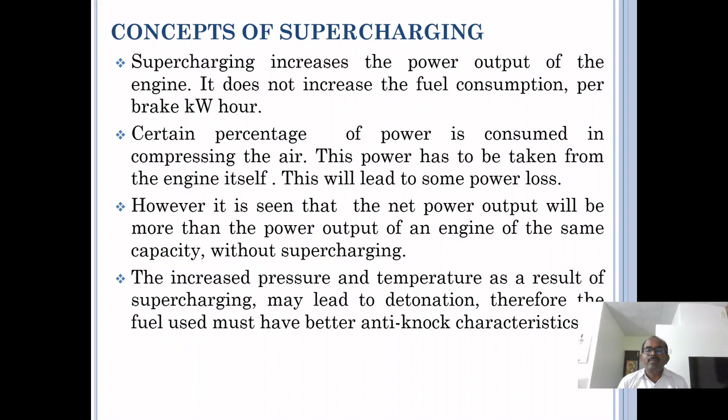The increased pressure and temperature as a result of supercharging may lead to detonation. Therefore, the fuel used must have better anti-knock characteristics. So in practice, racing car engines use supercharging.

The most important areas where supercharging is of vital importance: a supercharger is the pressure boosting device which supplies air at high pressure. A centrifugal, axial flow, or displacement type compressor is normally used. If the supercharger is driven by the engine crankshaft, it is called a mechanically driven supercharger.

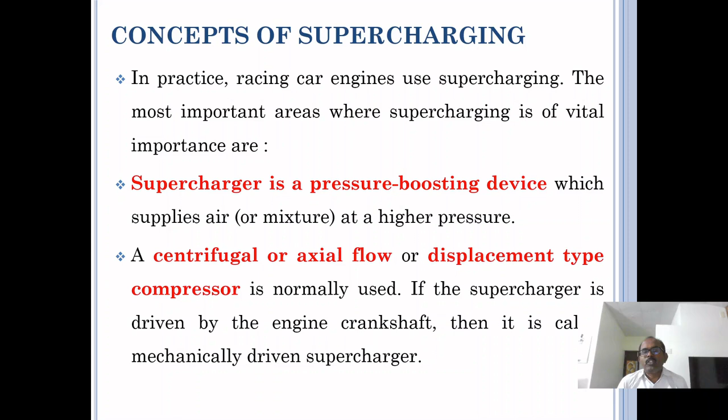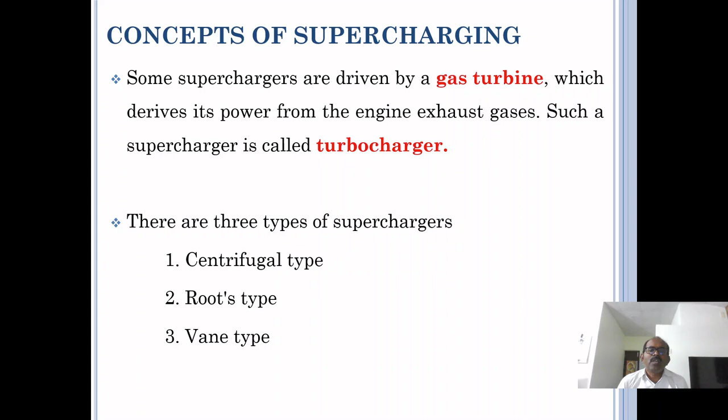Some superchargers are driven by a gas turbine, which derives its power from the engine exhaust gases. Such a supercharger is called a turbocharger. There are three types of superchargers: centrifugal type, roots type, and vane type.

Here's the concept of the centrifugal type supercharging. The air enters into the center of the pump, that is the eye of the pump. Then gradually it enters into the impeller and the pressure is increased, then it enters into the diffuser and volute casing. The casing gradually increases, so the velocity is reduced and pressure is increased.

At the outlet of the centrifugal type, the pressure is increased with minimum losses. So as compared to other types, the centrifugal type gives more efficiency.

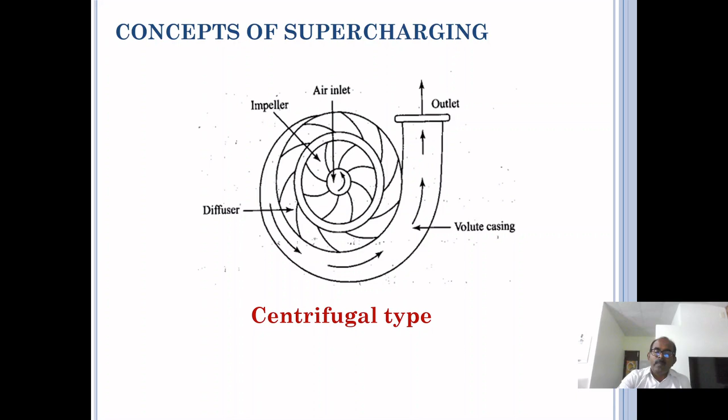Next, the concept of roots type. Two rotors are there, rotating. The rotors are just not in contact between them. The vacuum is created inside the pump, which sucks the air. Then the two rotors come into contact, and at this time the pressure is increased at the outlet.

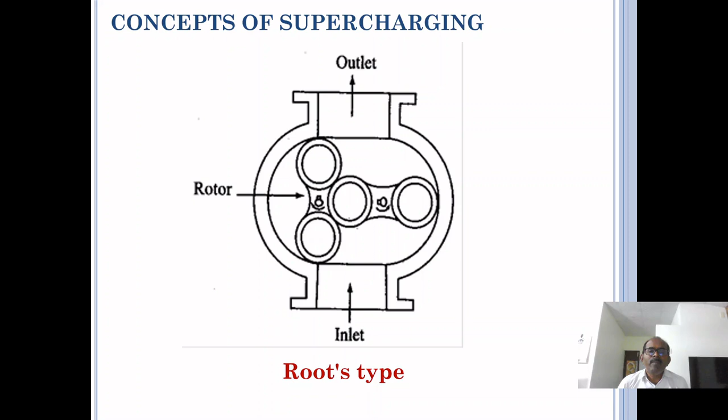Next, the concept of supercharging with vane type. During the rotation, the vanes are eccentric to the center of the body, the drum. So each and every vane has a spring type vane mechanism.

During the suction state, the vanes' springs are compressed, so in that condition the entire air is sucked through each vane. After that, after a second of rotation, it is suddenly released with high pressure. So this type of vane is used in small type applications.

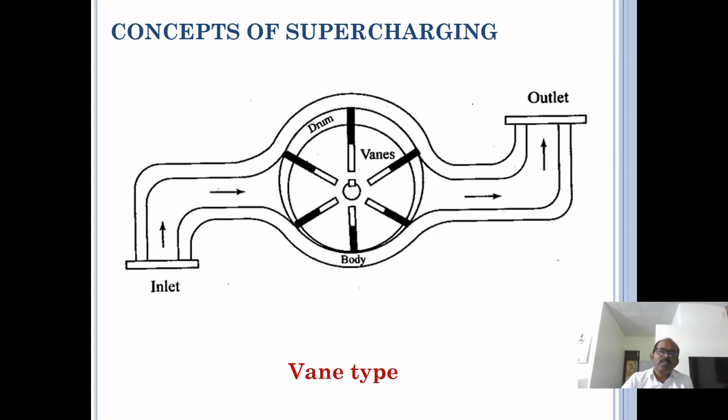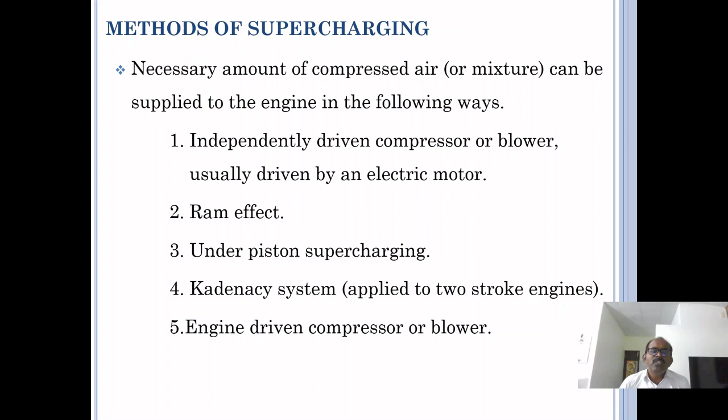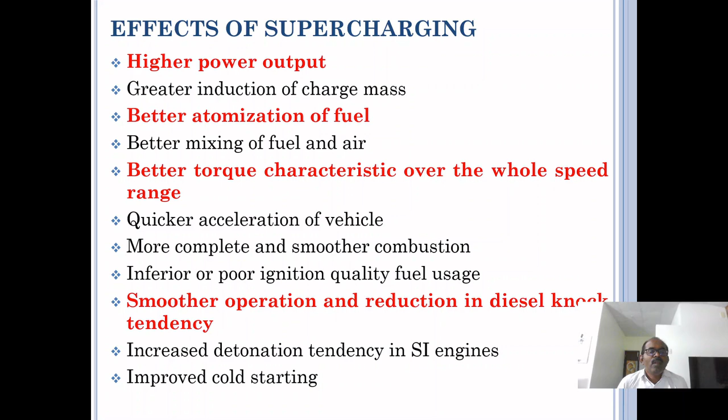Effects of supercharging: higher power output, greater induction of charge mass, better atomization of fuel, better mixing of fuel and air, better torque characteristics over the whole speed range, quicker acceleration of vehicle, more complete and smoother combustion, use of inferior or poor ignition quality fuel, smoother operation and reduction in diesel knocking tendency, increased detonation tendency in SI engines.

Improved cold starting. Now, limitations of supercharging.

Due to supercharging, the thermal load on the various parts of the engine increases. Increased gas loading caused by supercharging necessitates the use of larger bearing area and heavier engine components. In an existing engine, if supercharging has to be adopted, one should first study the factors that limit the extent of supercharging that can be tried. The permissible extent of supercharging depends upon the ability of the engine to withstand the increased gas loading and thermal stresses.

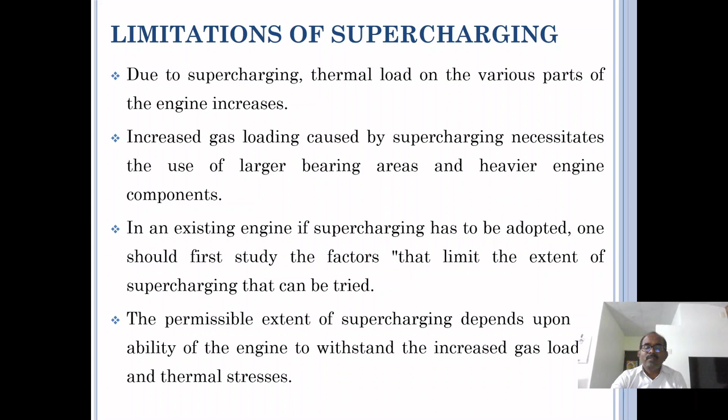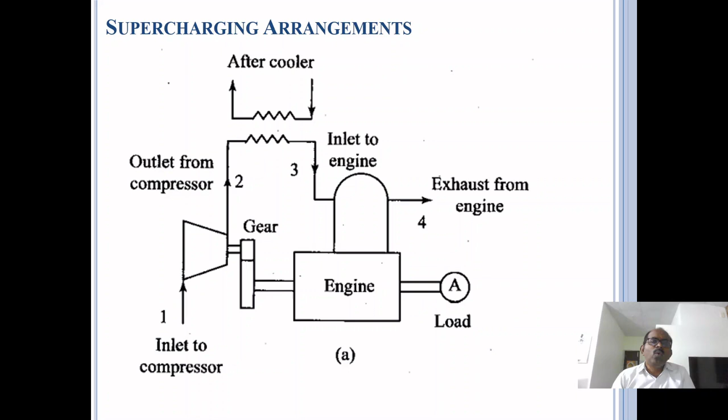Supercharging arrangement: the air intake and the compressor are fixed, and the compressor is run by the engine. The air enters into the compressor, and at the outlet the compressed air pressure is increased. After cooling, the air is then let into the engine.

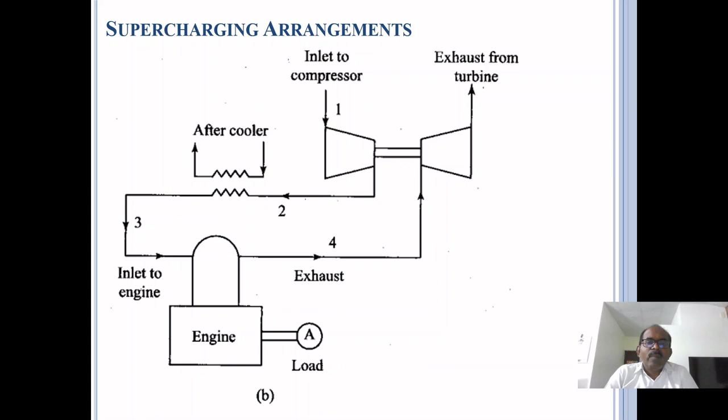Next, another supercharging arrangement: the inlet to the engine is used with a turbine. The exhaust turbine uses exhaust gas from the engine. Here is another method of supercharging with an exhaust turbine and inlet compressor.

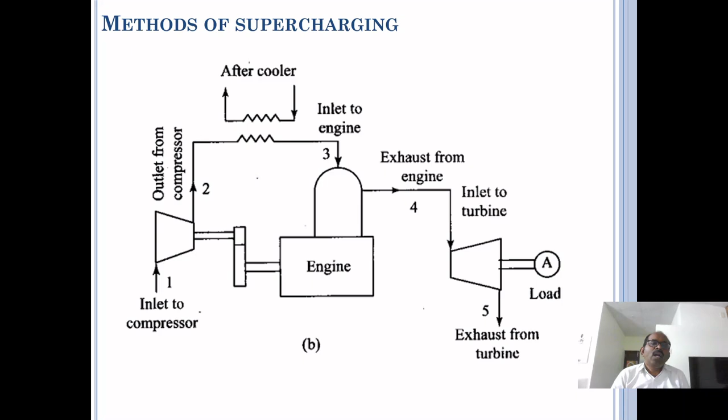Various methods of supercharging are there. One more method is where the outlet from the compressor connects to the engine, and the exhaust connects and inlets to...